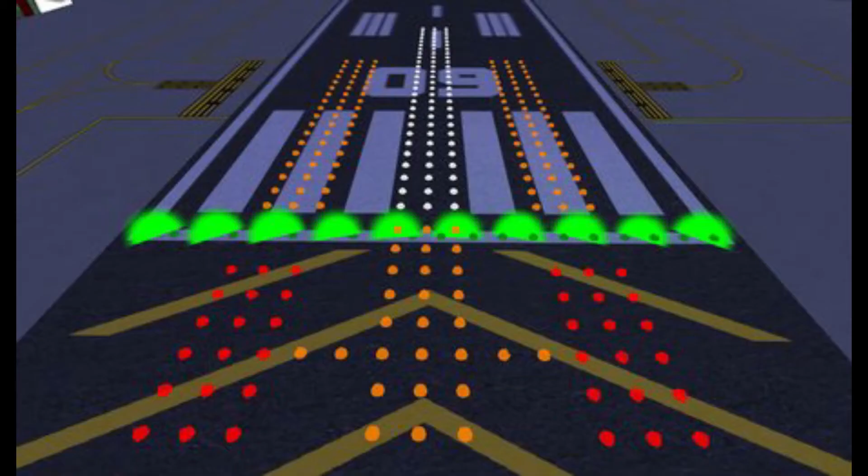The relationship between the aircraft's position and these signals is displayed on an aircraft instrument, often additional pointers in the attitude indicator. The pilot attempts to maneuver the aircraft to keep these indicators centered while they approach the runway to the decision height. Optional markers provide distance information as the approach proceeds, including the middle marker placed close to the position of the decision height.

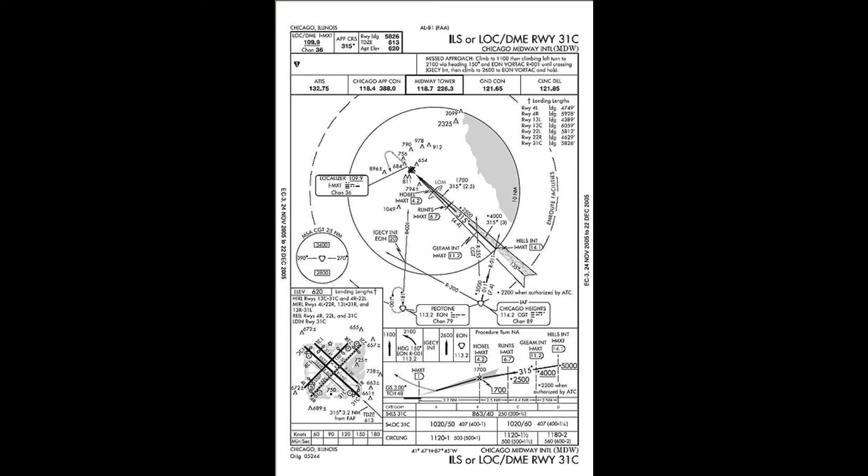ILS may also include high-intensity lighting at the end of the runways. Using ILS, an instrument approach procedure chart, or approach plate, is published for each ILS approach to provide the information needed to fly an ILS approach during Instrument Flight Rules (IFR) operations. A chart includes the radio frequencies used by the ILS components or navaids, and the prescribed minimum visibility requirements.

An aircraft approaching a runway is guided by the ILS receivers in the aircraft by performing modulation depth comparisons. Many aircraft can route signals into the autopilot to fly the approach automatically.

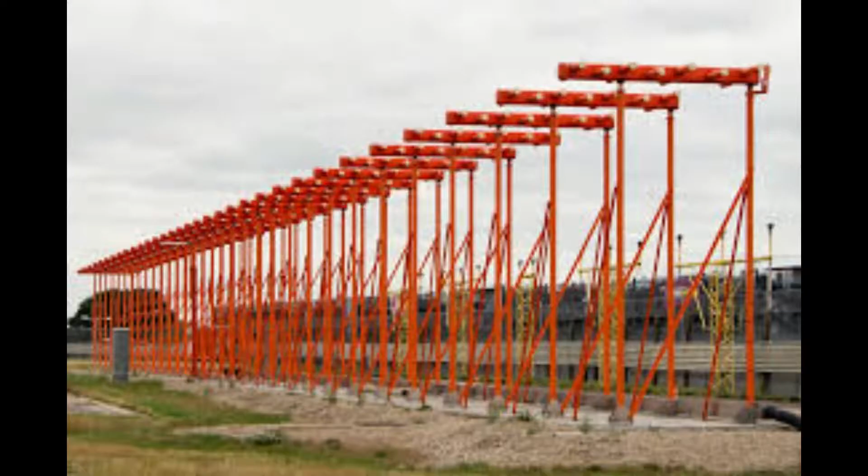Localizer. A localizer is an antenna array normally located beyond the departure end of the runway, and generally consists of several pairs of directional antennas. The localizer will allow the aircraft to turn and match the aircraft with the runway. After that, the pilots will activate approach phase.

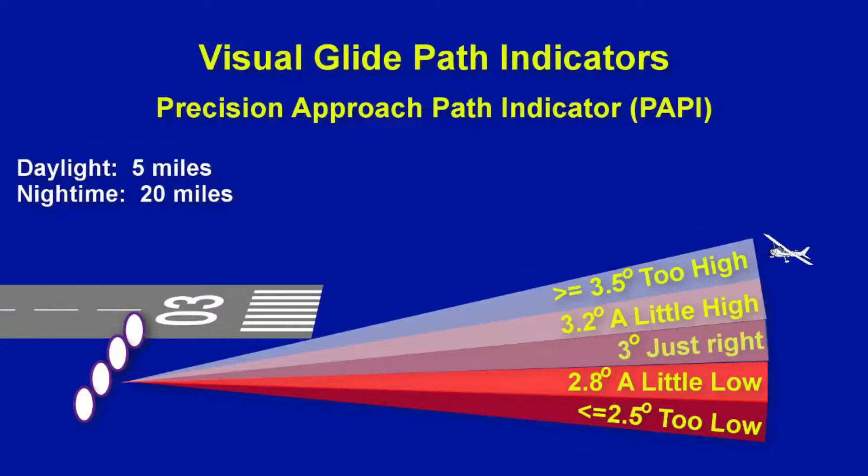Glide slope, GS. The pilot controls the aircraft so that the glide slope indicator remains centered on the display to ensure the aircraft is following the glide path of approximately 3 degrees above ground level to remain above obstructions and reach the runway at the proper touchdown point.

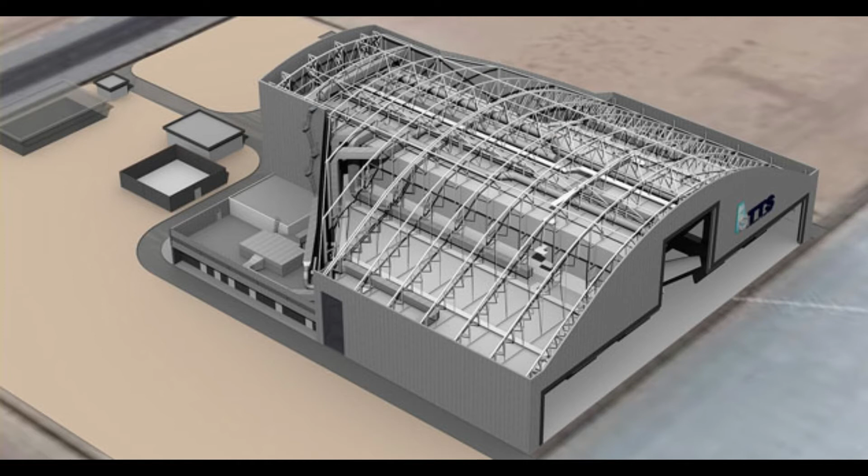Limitations. Due to the complexity of ILS localizer and glide slope systems, there are some limitations. Localizer systems are sensitive to obstructions in the signal broadcast area, such as large buildings or hangars. Glide slope systems are also limited by the terrain in front of the glide slope antennas. If terrain is sloping or uneven, reflections can create an uneven glide path, causing unwanted needle deflections.

Additionally, since the ILS signals are pointed in one direction by the positioning of the arrays, glide slope supports only straight-line approaches with a constant angle of descent. Installation of an ILS can be costly because of siting criteria and the complexity of the antenna system.

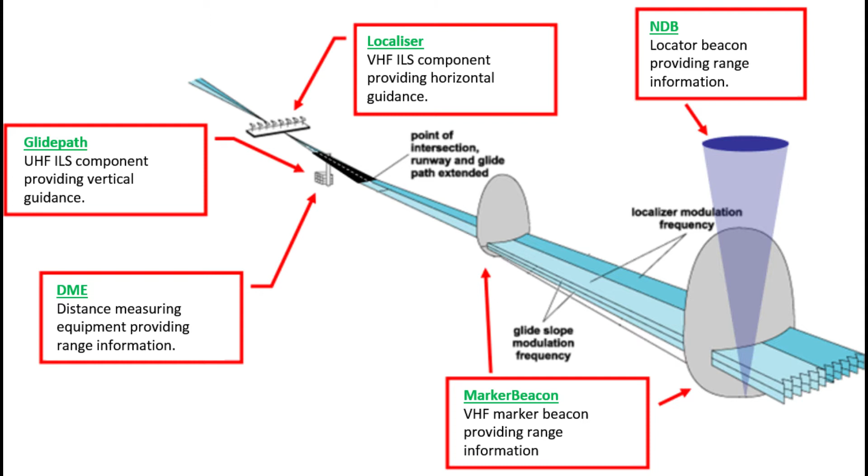ILS critical areas and ILS sensitive areas are established to avoid hazardous reflections that would affect the radiated signal. The location of these critical areas can prevent aircraft from using certain taxiways, leading to delays in takeoffs, increased hold times, and increased separation between aircraft.

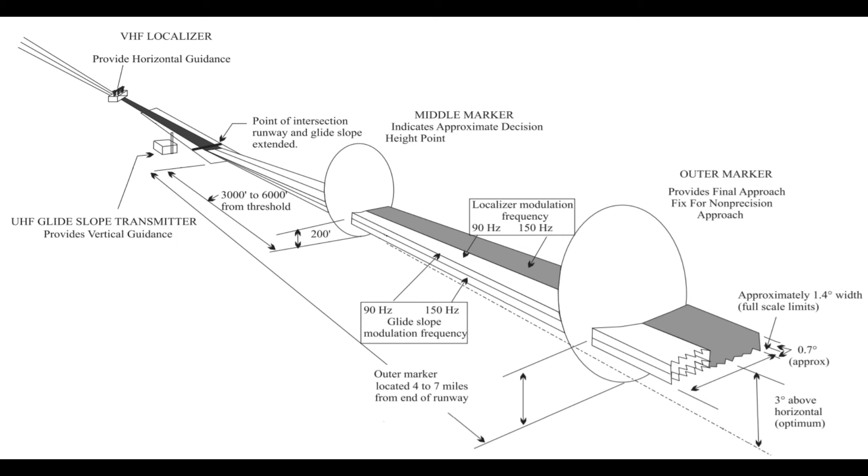Identification. In addition to the previously mentioned navigational signals, the localizer provides for ILS facility identification by periodically transmitting a 1020 Hz Morse code identification signal.

For example, the ILS for runway 4R at John F. Kennedy International Airport transmits IJFK to identify itself, while runway 4L is known as IHIQ. This lets users know the facility is operating normally and that they are tuned to the correct ILS. The glide slope station transmits no identification signal, so ILS equipment relies on the localizer for identification.

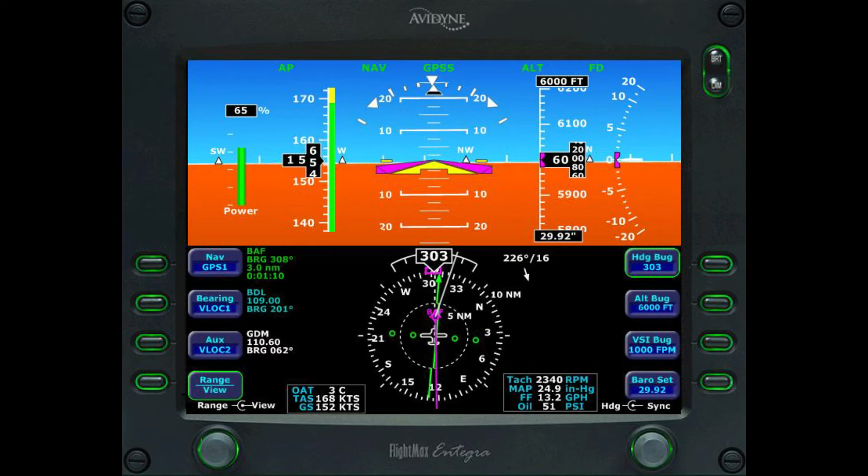Monitoring. It is essential that any failure of the ILS to provide safe guidance be detected immediately by the pilot. To achieve this, monitors continually assess the vital characteristics of the transmissions. If any significant deviation beyond strict limits is detected, either the ILS is automatically switched off, or the navigation and identification components are removed from the carrier. Either of these actions will activate an indication, failure flag, on the instruments of an aircraft using the ILS.

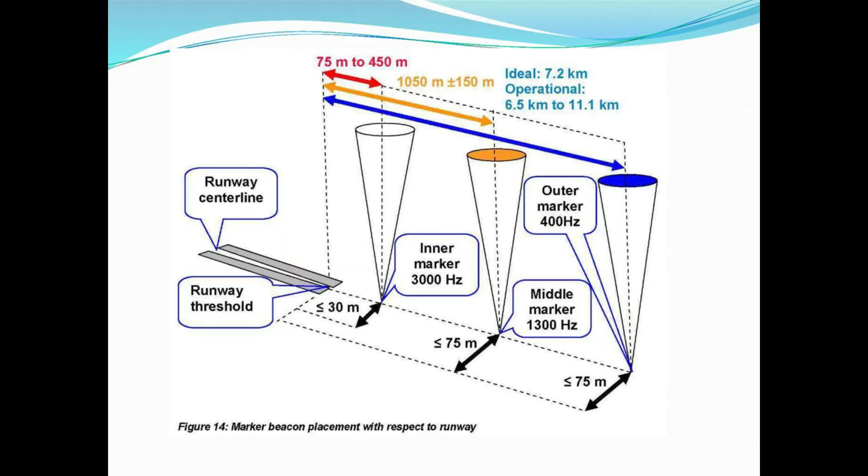Marker beacons. On some installations, marker beacons operating at a carrier frequency of 75 MHz are provided. When a transmission from a marker beacon is received, it activates an indicator on the pilot's instrument panel, and the tone of the beacon is audible to the pilot.

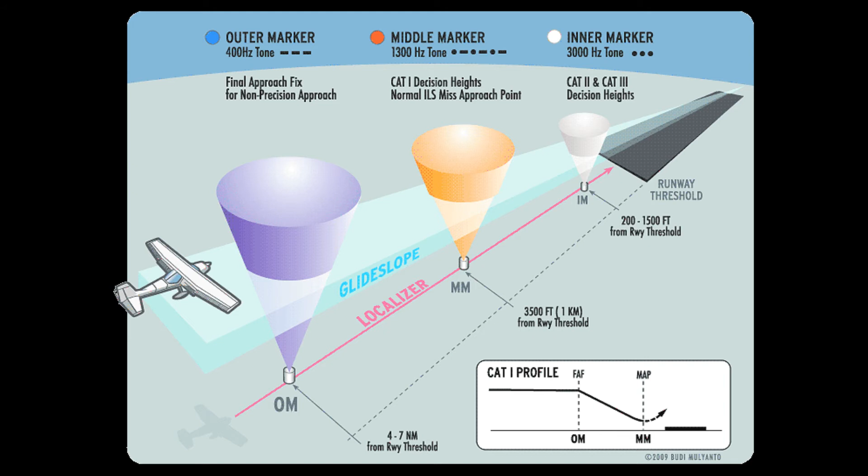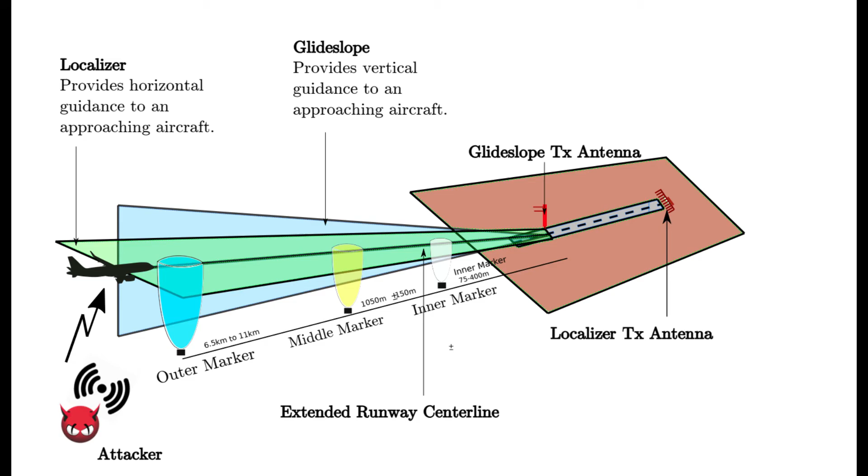The distance from the runway at which this indication should be received is published in the documentation for that approach, together with the height at which the aircraft should be if correctly established on the ILS. This provides a check on the correct function of the glide slope. In modern ILS installations, a DME is installed, co-located with the ILS, to augment or replace marker beacons. A DME continuously displays the aircraft's distance to the runway.

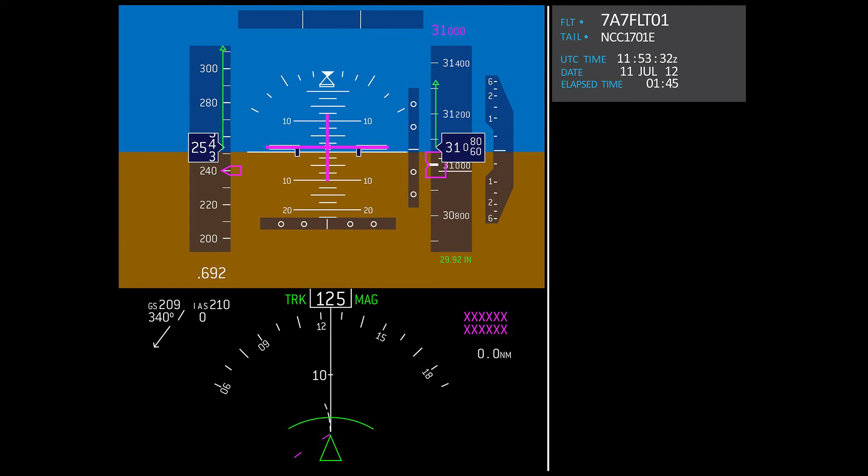DME, Distance Measuring Equipment, provides pilots with a slant range measurement of distance to the runway in nautical miles. DMEs are augmenting or replacing markers in many installations. The DME provides more accurate and continuous monitoring of correct progress on the ILS glide slope to the pilot, and does not require an installation outside the airport boundary.

When used in conjunction with an ILS, the DME is often sited midway between the reciprocal runway thresholds with the internal delay modified so that one unit can provide distance information to either runway threshold. For approaches where a DME is specified in lieu of marker beacons, DME required is noted on the instrument approach procedure, and the aircraft must have at least one operating DME unit, or an IFR-approved GPS system to begin the approach.

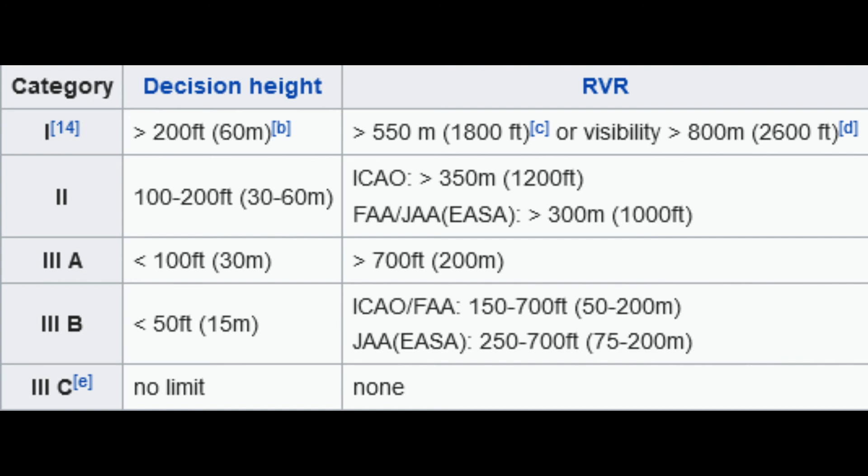ILS categories. Smaller aircraft generally are equipped to fly only at Cat 1 ILS. On larger aircraft, these approaches typically are controlled by the flight control system with the flight crew providing supervision. Cat 1 relies only on altimeter indications for decision height, whereas Cat 2 and Cat 3 approaches use radio altimeter to determine decision height.